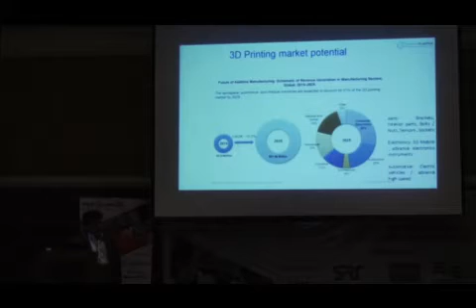You can see here some segments showing why high temperature polymers or high performance polymers are important. Here is the contribution of different industry segments to the growth till 2025. Especially, all of us have talked today about aerospace, biomedical, automotive, and consumer electronics. These industries are playing a key role in this segment.

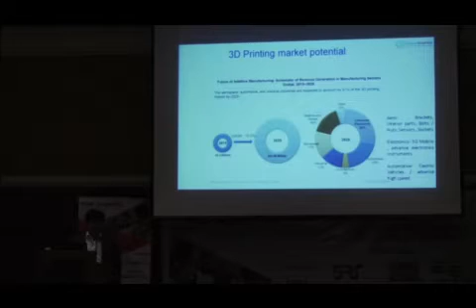Especially in polymers, there are unique requirements with aerospace, as we know fuel is a big cost and there's huge pressure to bring down the weight of parts. So complex parts and structural parts are the key requirement, and in the next few years there will be 35,000 aircraft that need to be built. So a lot of opportunities are there in this field. You can make brackets, interior parts, sockets, and all this kind of stuff.

In automotive also, there is a trend of electric vehicles. So there also you have high speed electrical vehicles in most automotive vehicles, and high speed and electric applications also require tribological, wear and friction resistant material, and heat resistant material.

You can see in the biomedical segment also, many of our friends have talked today about implant applications, surgical tools, and many other applications. But considering these future challenges, there is a lot of research going on, and we are also getting a lot of inquiries in terms of new developments, new blends with ceramics and polymer, and different kinds of nanocomposites and all this. That is an amazing field.

And one more field is consumer electronics. You can see the development of 4G, and now China and some other countries are coming up with 5G. With 5G and high speed internet, electronic equipment, including mobile tabs, TVs and all this, are becoming more compact. When you make it more compact, you need more high heat resistant electronic components inside the device. That's why the need for high temperature polymers will be very high in this segment.

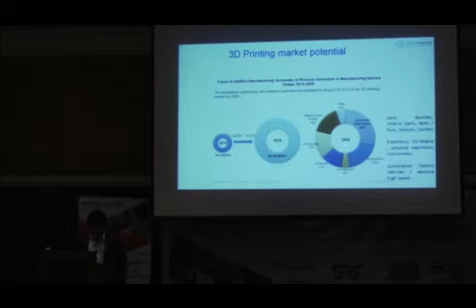As projected by SmarTech and some other sources, the growth in this segment—aerospace, automotive, and biomedical—is phenomenal, it's 52%. This is in overall growth and this special materials growth.

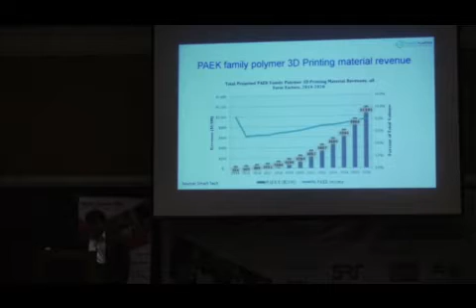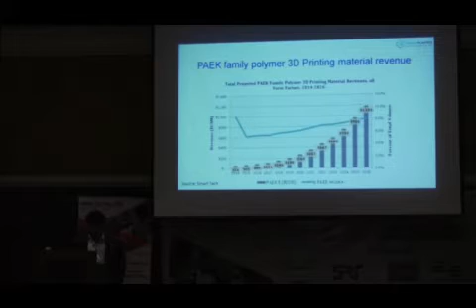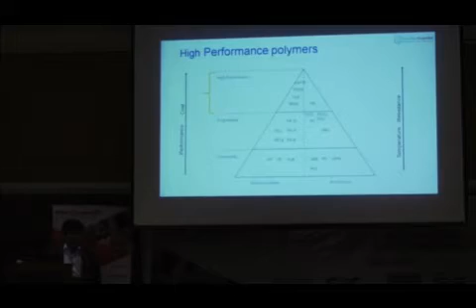From the ground floor you can go up to the first floor, which is engineering plastics. In that engineering plastics category, some materials are very unique and have very high demand, like PA 11 and 12. Nylon 11 and 12 have become very unique and attractive materials for the global market today, and they've been accepted by most segments. TPU is also one of the best materials, and PETG, PES, PPS, PESU, and all these materials are fantastic.

Now, the difference between the ground floor and first floor: the ground floor materials have a melt temperature of somewhere around 160, 170 degrees C. When you go to the first floor, engineering plastics, this is in the range of 200 to 250 degrees C temperature.

So that's why it is, on engineering in the middle band. Now I'm going to talk here on the top floor. So top floor you can see high performance engineering plastics material, where the melt temperature goes beyond 300 degrees C, so that is 300 to 400 degrees C melt temperature.

And along with that melt temperature, there's continuous heat resistance in the application, from 240 degrees C to 300 degrees C. With unfilled material, it can withstand 240 to 260 degrees C, and when you add carbon fiber, it can go up to 300 or more than 300.

So there is a PAEK group - PEEK, then PEK, PEKK, and ABPBI. And on the right hand side, it is polyetherimide, which is a transparent material. ABPBI is one of the fantastic materials.

In top floor, ABPBI is not yet visible in the 3D printing market. We are assuming and we hope that this material will come, because this material has the highest heat resistance. It can withstand up to 500 degrees C continuous temperature, and this is the only thermoplastic like that.

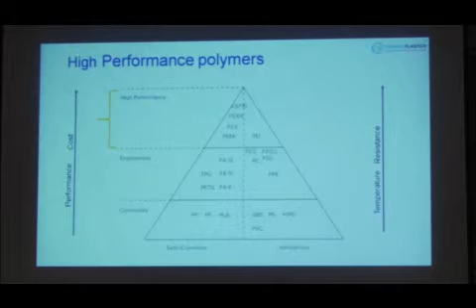Here you can see PAEK family members of the polymer, especially PEEK - polyether ether ketone, PEK, PEKK, and ABPBI. The first three are polyaryl ether ketones, so you can play with ether and ketone linkages and the ratio.

And when you change the ether and ketone linkages, you can change the glass transition temperature, and you can play with this continuous heat temperature resistance and melt temperature, processability, stiffness, and all this. You can play around with that.

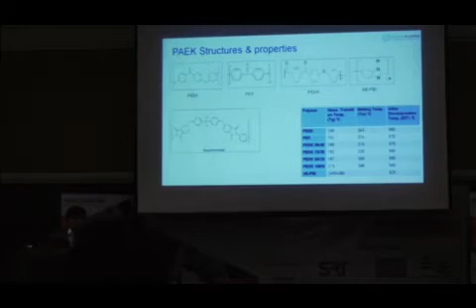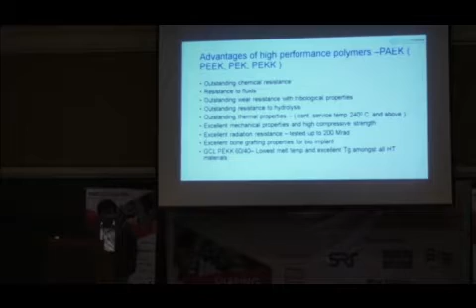Advantages of high performance polymers - what are the special advantages? It has outstanding chemical resistance, resistance to fluids and susceptible oils and gases, excellent wear and friction properties, and you can see very good tribological properties.

The PV values are very good with all these materials, and the hydrolytic resistance is very good, outstanding thermal properties. Continuous service temperature, as I discussed, is 240 degrees C to 300 degrees C you can achieve with this polymer. Excellent mechanical properties with good compressive strength - for biomedical people, this is the most important property. And even in many other applications like textiles and gears, these properties are considered very well.

Excellent radiation resistance. We are the manufacturer of this kind of polymer, and we have tested this material for radiation resistance - because it has excellent radiation resistance, I've tested up to 200 megarad. This material can be used for defense applications, nuclear power plants and thermal power plants, ISRO.

Like ISRO, we are one of the approved vendors in ISRO, and a lot of applications we have developed with ISRO. Our material has been used for bus bar applications in ISRO, and it is already there in space. Excellent bone grafting properties too.

So you can see PEEK - recently Evonik has introduced PEEK medical grade 3D printing filaments. PEEK is the material, and PEKK and PEK as well. This material has excellent fatigue and creep resistance.

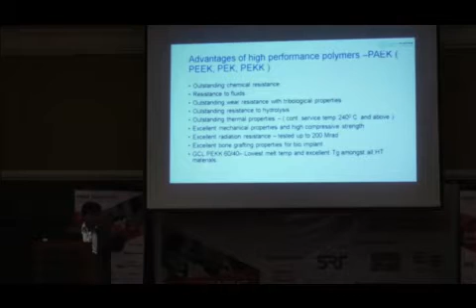And there are a lot of blends, and other new composites are under place on an R&D stage, where you can see a lot of blends have been created with ceramics and PEEK, and you will see a new product for biomedical implants in future.

I will talk a little bit in detail about this PAEK, different materials. So you can see here the chemical structure of PEEK, polyether ether ketone. This is a semi-crystalline polymer, widely available - there are more than 5 to 6 manufacturers in the world, and that's why this material is commercially available.

PEEK is a material which has a melt temperature of somewhere around 340, 360 degrees C, and glass transition temperature is somewhere around 140 degrees C. This material is easy to process, that's why these filaments are available in the market, and this material is quite widely visible in FDM filament type FFF technology.

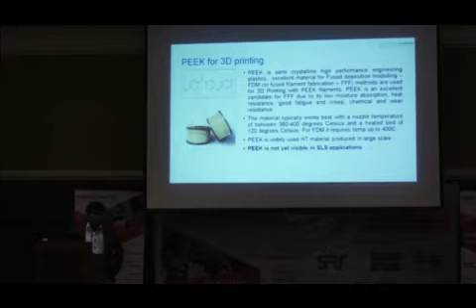This material is very well visible, and we have experienced that since there are a lot of manufacturers available, but even though this material is not visible in laser sintering application - so that is we are wondering. We assume there is a limitation with this material in laser sintering, probably the crystallization behavior of this material. So there you can go with other aryl ether ketone materials. This material is available in filament, and it's not in laser sintering.

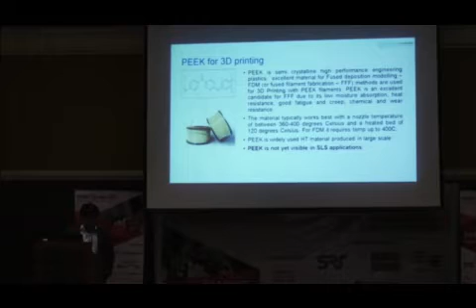Another material is PEK, polyether ketone. You can see this material is also similar to PEEK, but it has 20-degree continuous higher temperature. So when you are using PEK, you can withstand 260 degrees centigrade continuous temperature with only the unfilled material. When you use this material with carbon fiber, you can go up to 320 degrees C continuous temperature. So that is amazing about this material.

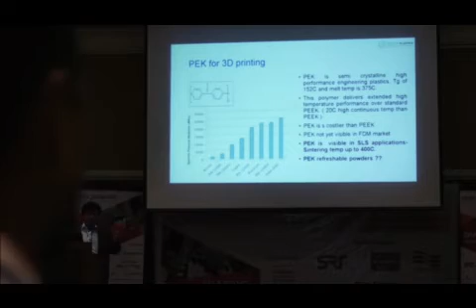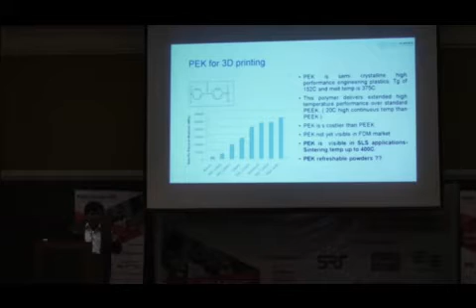This material has a higher melt temperature than PEEK. That is one of the limitations, because when you want to process this material in extrusion for filament, you have to go up to 400 degrees C. When you want to extrude this material at 400 degrees C, you need a lot of heat control and a lot of processing parameter control. That's why many people are not trying this material for filament, or maybe it's still not yet successful in making filament. So this product is not available in the filament or FDM market, but it is very well available and commercialized in laser sintering application.

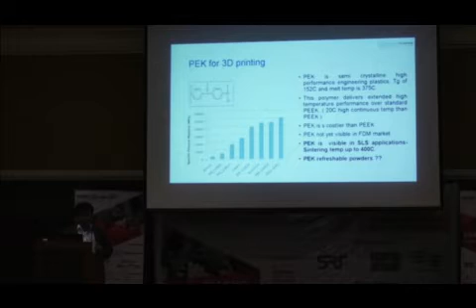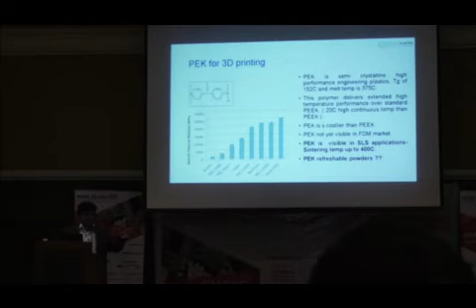This is approved by Boeing and Airbus, and many components have been made with this material PEK. You can see EOS P800 can process this material. One of the challenges with this material in laser sintering is reusable, refreshable powder - in Europe people use the word refreshable, in India we say reusable. That reusage of the powder after one cycle is a big challenge. The wastage is 60 to 70%, and it's a huge cost. But still it has applications.

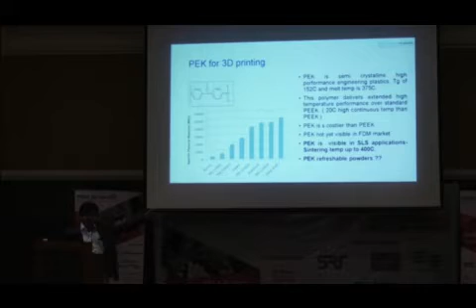And these are some comparisons with different metals. It's almost comparable with different metals by adding different fillers in this.

Then you can see PEKK. Now that's a very amazing and interesting new generation material, and this will have a better future over all PAEK materials. We believe that this material will take over other high performance thermoplastics' place, because this will solve a lot of challenges. First of all, this material you can process at very low melt temperature. This is also a semi-crystalline polymer, but the beauty of this material is that you can process it at only 310 degrees centigrade temperature. So it is easy to process in normal machines.

You can extrude filament very nicely. This personally, I have taken this trial. This filament is golden brown, absolutely fantastic. We have printed this component and we will show this component here. Last week only we have printed it, and it's amazing performance.

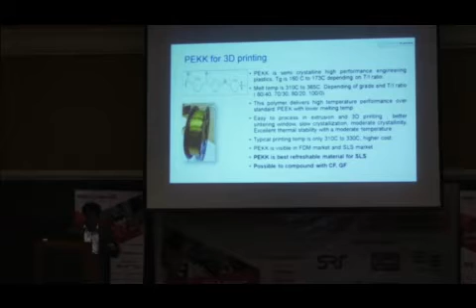The uniqueness of this material is that it has a better sintering window, because of its TG and TM. If you have a broader difference between TG and TM, you have a broader sintering window. When you have a broader laser sintering window, you can play around with your laser sintering process parameters. So that's why it's very unique. This material is refreshable - reusable is one of the biggest advantages. 100% you can reuse this material. There is no wastage. And it has a moderate crystallinity and excellent thermal stability with continuous high temperature resistance. This material is very well visible and available in the filament FDM market and laser sintering market. So that's a unique material.

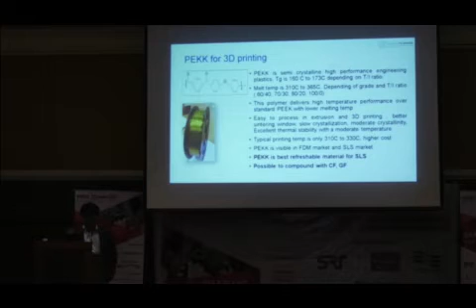Another is polyetherimide, brand name Ultem, very much popular worldwide. It is owned by SABIC, the inventor of this material. This is a fantastic high temperature material, and its TG is 217, which is highest among these other thermoplastics. It has absolutely low outgassing properties, and continuous temperature resistance is 190 degrees C. You can melt process this material at 340 to 360 degrees C.

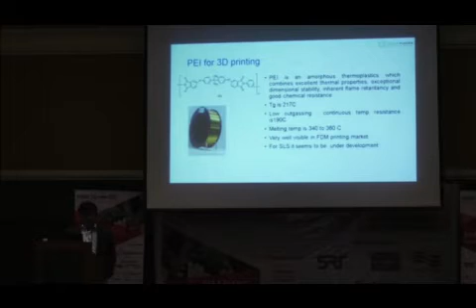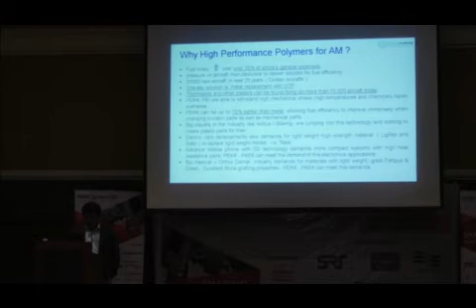So we have already discussed why high performance polymers are used for additive manufacturing in aerospace applications, for lightweighting - I don't want to repeat all this again. But I can say that advanced mobile applications and biomedical implants look very attractive for the Indian market, because aerospace is yet to develop here. But we have a lot of projects with defense, with DRDO, DMSRDE, then ISRO is there, and NPCIL, BARC. So we are approved everywhere.

So for printers or forward-integrated people, we can help them because our material is specified everywhere. We are the only company in India into raw material manufacturing, and we invested huge money in that. This will be a big benefit for Indian people to compete with the global market. If you want to import this material, the cost is not less than 35,000 rupees per kg, with a 40% custom duty. We can provide this material locally, so that's a big benefit to the Indian industry.

Dr. Gharda is the founder of this company. He's a 90-year-old chemical scientist, known as the father of chemical in India. He's still working in our organization, and he's a big inspiration for all of us.

The other challenge is that at the moment people have to use stock shapes and bars when they want to create a new product, so prototyping is a challenge. People are using stock shapes and bars, and then they have to fabricate it. That's a very crude method and it's very costly. These stock shapes, when extruded, have different properties, and the quality is not as good compared to injection molding articles.

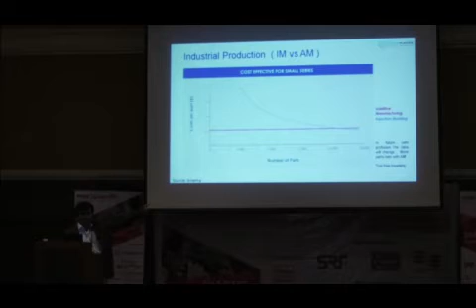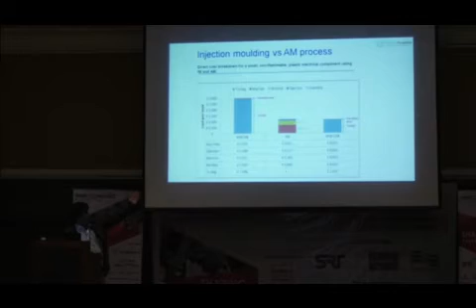You can see the cost comparison here. If you want to make 20,000 parts, the blue bar shows the cost of the tool in injection molding for one part. With the same 20,000 parts, if you use additive manufacturing, the cost is almost negligible. Now if you want to make a similar part in 1 lakh or 100,000 numbers, the tool cost goes down and becomes comparable with additive manufacturing.

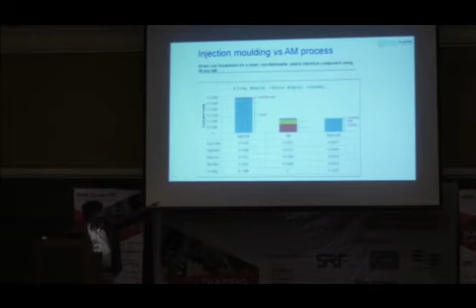In the future, maybe in the next 1 or 2 years, we'll add one more column showing this cost will become half with additive manufacturing. So it will become a tool-free technology - we are pretty confident on that.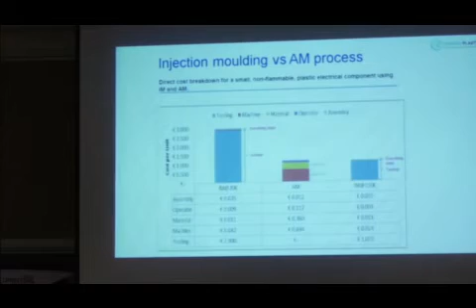No, you can't replace all applications. This comparison is for high performance things I am talking about. You can't make ball pens with additive manufacturing.

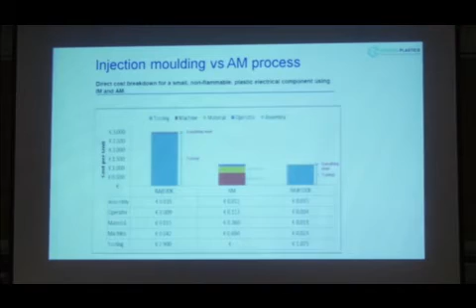This is a scenario we experienced with filament FDM technology. A few years back, 2-3 years down the time, when we looked into the market, we inquired with many machine manufacturers about FDM machines, and I did not get any supplier who could supply an FDM machine with more than 300 degree C temperature. I can count only a few, like Robos and some others in Germany, but nobody was really available. We saw that 85% of the machines were able to process up to 250 to 220 degree C material, limited to nylon 11 and 12. But when you wanted to print PEEK and similar materials, there was no printer available.

So that ratio has changed. A few years back, there was a challenge of getting filaments and materials, so no company stepped into that field. There was no advancement, and this technology was not used for industrial production, only for prototyping.

Currently, we have seen in Formnext that this trend has changed. Now more than 50% of people are offering an FDM filament machine with more than 500 degrees C temperature. That's a big encouraging sign for high performance polymers. Companies like Solvay, Victrex, Sabic, Arkema, and BASF have all entered this field and started offering solutions and supporting customers to make filaments.

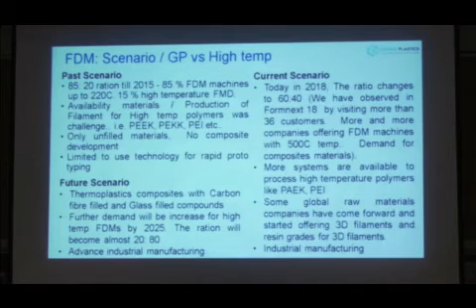Like FDM, the scenario in laser sintering is different. Compared to FDM, which is obviously less costly, laser sintering is very costly. Even the machines are very costly, and the powders are also very costly. This is a totally different game.

In laser sintering, the most popular materials are PEK, PEKK, PA11, PA12, and PEI. For nylon 11 and 12, there are big players like Evonik, Arkema, EMS, and Ube. For PEK, there is only one player, Arkema. But these are amazing materials.

Out of these materials, PEK, PA11 and PA12 are already commercialized, and people are using them. In fact, I missed here, PEKK is also commercialized. You can see Advanced Laser Materials, ALM, a division of EOS in the US. They started making carbon fiber filled PEKK material, and it's already available in the market.

The challenge with PEK, as I've discussed, is that refreshability and reusability is a challenge in laser sintering. The unique material again in laser sintering is PEKK, because we did a lot of research on this, and we're coming up with a 100 ton plant of PEKK that will become operational in the next 2 to 3 months. This is an amazing material because of its crystalline behavior, very slow crystallization, and nice cooling behavior, and you can handle this material at 320 degrees C.

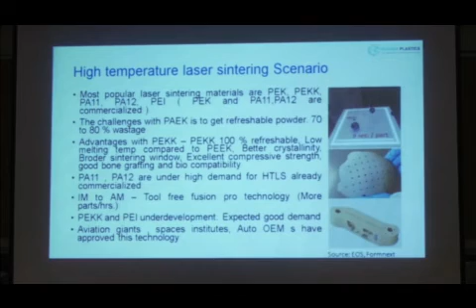These are some ideas which I've taken from these sources. You can see a comparison of this high temperature material, PEKK. The orange one is PEKK, gray is PEI, and blue is normal engineering plastic ABS. You can see the mechanical properties in different directions, tested in XZ and ZX direction. The mechanical properties are fabulous with high performance material after printing.

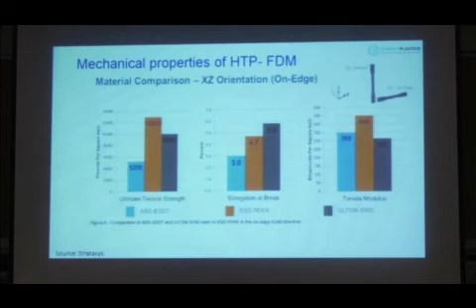You can see this in other directions also. The properties are very good with PEI and PEKK. Similarly, you can see the comparison of properties with heat deflection temperature, and the electrical properties are also very good.

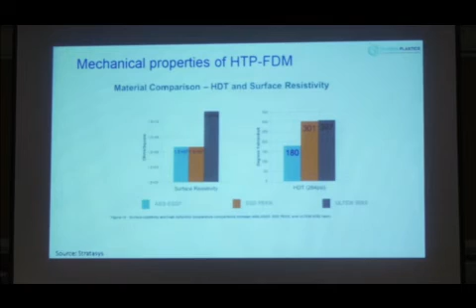As I said, we at Gharda Chemicals are an Indian R&D based organization, very patriotic company, and we are ready to serve the global market. We are now coming up with PEKK, and we would be happy to offer our filament grades.

We have three grades: 60/40, 70/30, and 80/20. The G stands for granule. For laser sintering powder we have three grades as well, and we can also produce customized grades. If somebody has a challenge and wants to modify the material, we have the capability to do modification as per the customer's needs. We can also do internal compounding, and give carbon fiber fill, milled or chopped carbon fiber, glass bead type glass fibers, or nano composite. We can do all this stuff.

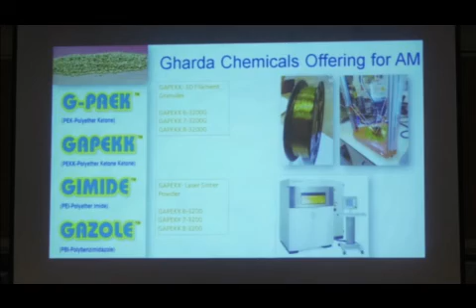These are some applications of high temperature polymers, just to give an idea of what kind of applications already exist in the market. Various sources are mentioned here, and these are PEK. All these, the second, third, are PEK and PEKK parts.

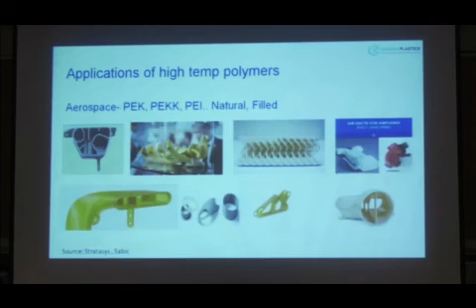These are also PEKK parts for aerospace. Now you can't mold this kind of stuff, it's impossible. This is another first row and second row, all PEK parts, and this black one is carbon fiber filled PEKK by Hexcel. They are supplying to Boeing, and there is big demand for this material.

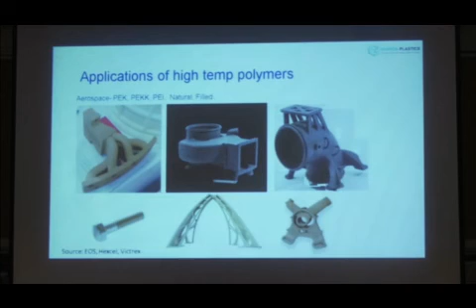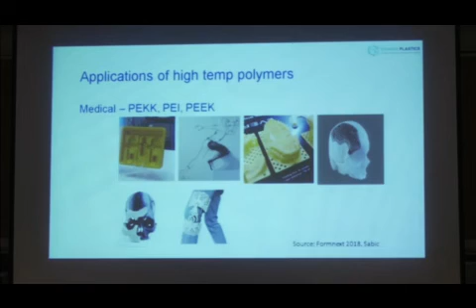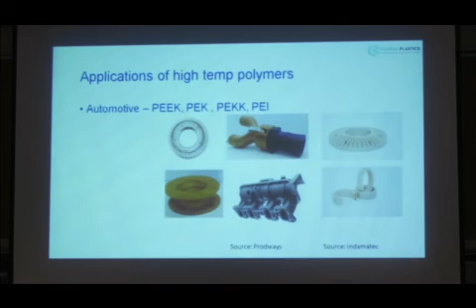These are automotive applications. Especially in automotive we are more working with engine related parts, gears and this kind of stuff, and shafts. This is our material which we have tested last week.

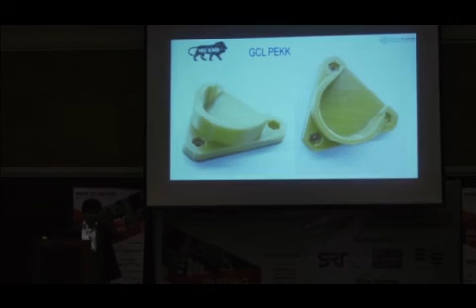This has a 0.2 layer. This is an aerospace bracket we have made here, and these components are available if anybody wants to see them. We have also made some rockets because we are working with ISRO, so we have some special projects with them - I made this.

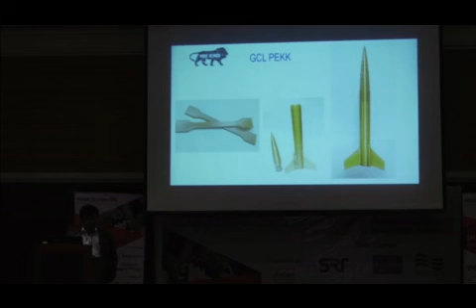We have also done testing of our specimens - HDT, flexural, and all this - and it's showing very good results. These are some trial parts where you can see different fill percentages: 20% fill, 40% fill, 100% fill, and what the fill ratio is. This is by Damara Gold, who have printing facilities in Mumbai and Dubai, and you can see here the printing parameters - it is processed at just 310 degrees Celsius.

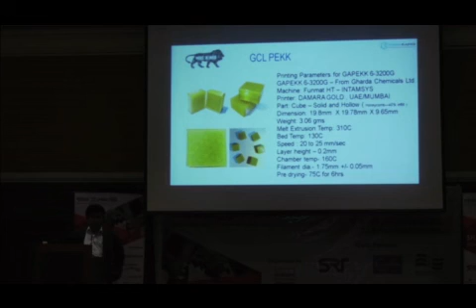That's it. If there are any questions, you can ask.

Yes, we can provide a sample for trial - filament, yes, I have a very small sample available, and we are producing more filament in our internal R&D. We would encourage people to produce filament themselves, because we are a raw material company. We are going to make some in our R&D as well, but we don't want to become a filament seller. Personally, we would encourage 3D printing people to take care of their jobs, because if we started doing printing and filament ourselves, we don't want to compete with them - we want to support our customers. We are a material supplier, but we have filament produced in our R&D, so if you want, I can give you a small sample of that.

Just last week we were discussing about PEK material being used for a soft tool. There's a proto tool we are making, about 100 odd shots needed. So we were thinking whether we can use this as an insert in the mold for that particular application. Do you think it's possible? Yeah, you have to share with us the technical requirements, especially temperature resistance - what sort of temperature resistance is required?